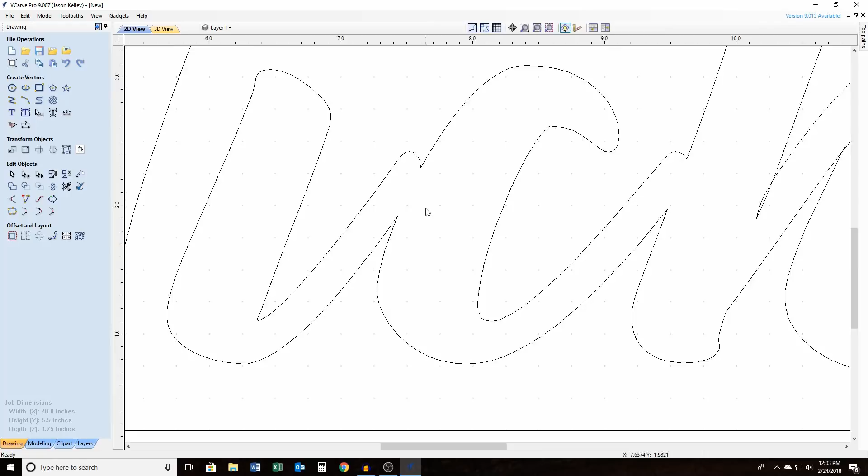Now we're going to select this whole thing again, and then come over here to this weld selected vectors function. Well, excuse me, we need to select the whole thing, and then deselect the middles of any letters. Then we'll do the weld function, and if you watch what the letters do, boom, they've all connected to each other, and it's cut out the space in between.

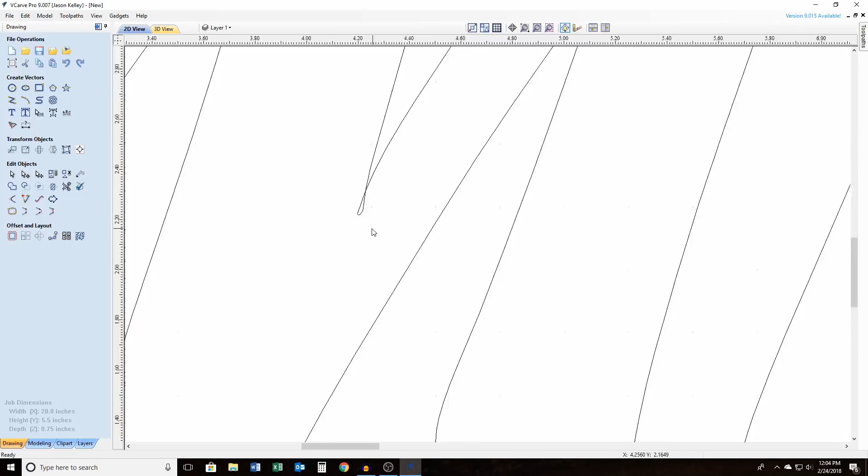Now you notice that they're still going to be separate pieces, and you might end up with something like this. So in a case like this, where you have an overlap, I don't know what else you would call it, you can come in here and just delete that, and then you've got a perfect set of connected vectors and you're ready to go. You can check it to see if there's another one. So we're going to go ahead and delete that, and then slide over here, and it looks like the rest of it's good to go.

So one more time, we're going to select all the letters, and we're going to go ahead and come over here and group them back together. Now when we click on one, they all light up. Alright, so one more time, we're just going to make sure everything's nice and centered.

And that's just about it for the text. Now we want to create our pocket toolpath. So we need to click on the outside border or the inside of the border, and we need to shift and click on the word itself.

We'll come up here to our toolpaths, and we're going to do a pocket toolpath. The way this is going to work is on our cut depth, we're going to start at 0, which is going to be the very top of the stock, and we want to cut it down to 0.2 inches.

Down here we have our clearance pass. If you don't use a larger area clearance tool, this would take you forever, especially if you use a small bit. So I usually use the larger area clearance tool, and I usually use a 1/4 inch bit depending on the size. The size of this one, 1/4 inch is just fine. My clearing bit, I'm going to use the 1/16 inch, and that's usually what I end up using for cleaning up signs that I do like this.

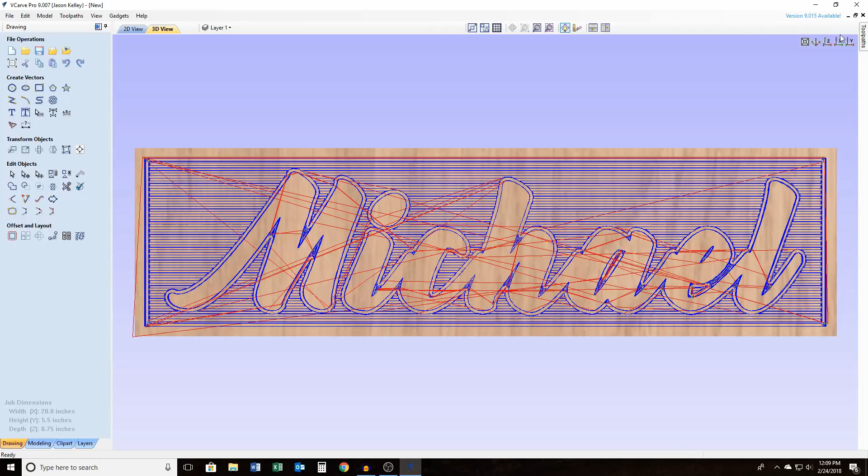And let's go ahead, we'll reset our preview, and we will see what this looks like. There's your 1/4 inch bit doing your clearing, and there's going to be 2 of those passes.

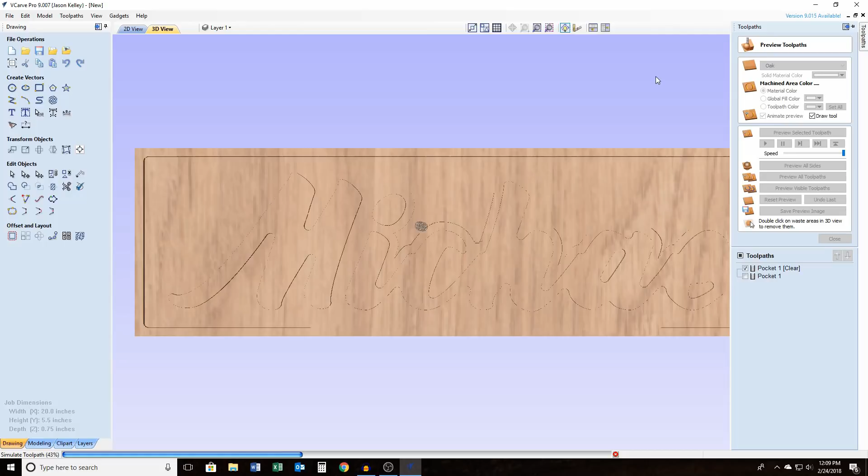Now keep in mind, I'm doing this live. It's not a voiceover. I'm wanting to do it in real time so you can see that it really doesn't take that long to design a simple sign like this and do all your toolpath work and everything else. It's pretty quick once you get the hang of it. Now we gotta wait.

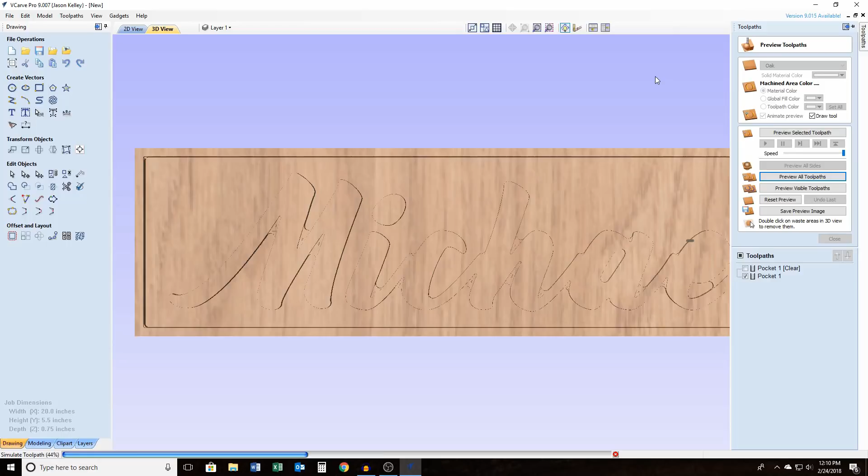Okay, now the 16th bit comes in and cleans up everything the 1/4 can't, and it's done. So there you have your

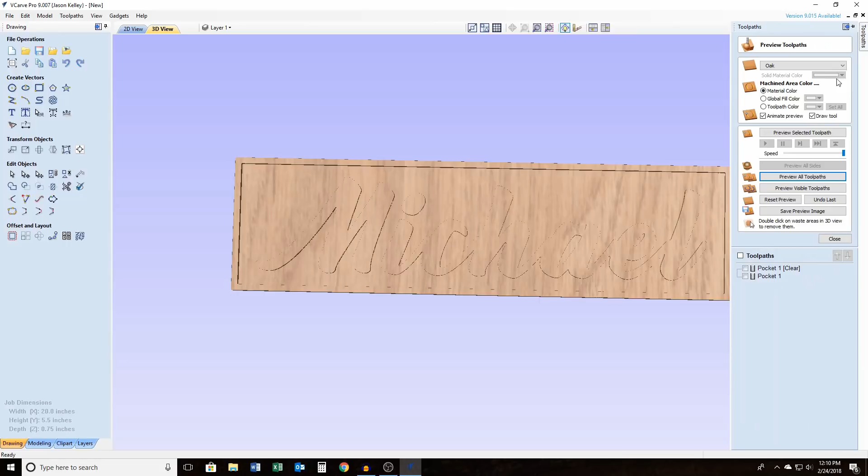You can make sure this is going to be solid wood. I'm not color filling it, but if you want to make sure your bits are able to reach all the different areas, you can fill it with some color, so you can see there's nothing that doesn't get cut because the bit doesn't fit in there. The 16th inch bit usually fits just about everywhere, so that's going to be pretty good. Alright, so on this piece, since they don't want it colored, in oak, when you do pocket carving like this, the word you carve tends to blend in with the background because it's such a grainy wood.

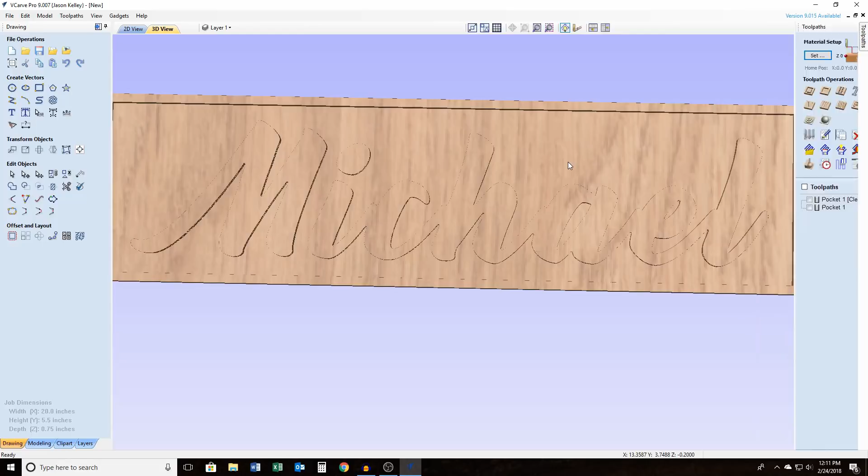So what I want to do is put a texture in the back. How we're going to do that is select our inside border, shift and select our word again, go back to our toolpaths, and go to this texture toolpath.

Now, I put all these settings in prior, and really the only way to do this is trial and error. Change your settings, preview your toolpath, and see what it looks like until you get it the way you want it. But basically, what I've chosen is a ball nose 1/8 inch bit. My start depth is 0.2 inches because that's how deep this pocket's going to be when it's pocket carved. And then you've got all these settings down here: your max cut depth, 1/8 inch, your minimum cut depth, and you can set that to whatever you want.

So there's a variation between the textures. Your cut length, you've got a max and a minimum. Your overlap, 30% is what I chose, and then you can select a variation. What that percentage does is change up your overlap 53% of the time, so you get different overlaps. And then step over, once again you set your inches and then your variation. If you want an angle, you can put it at an angle, but for this one I don't - I'm just going straight left to right, so that's 0 angle.

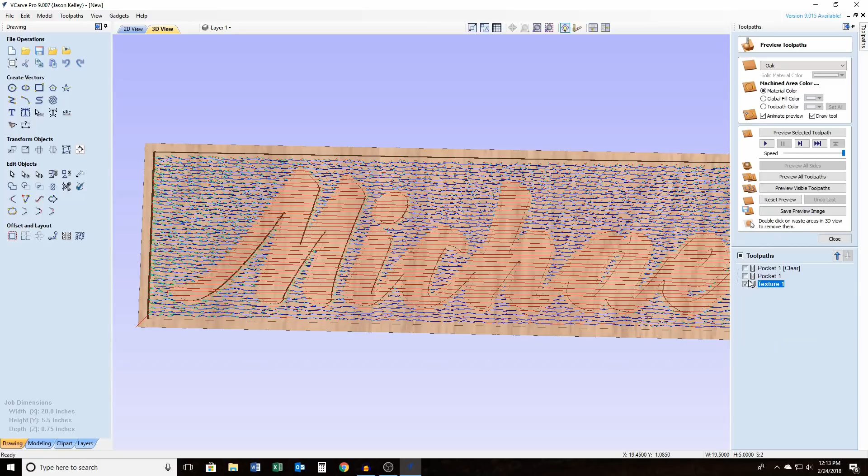And then boundary vector offset. Now, what you're going to need this for is when this little bit comes in here, you don't want it to touch the edges of this raised lettering. So what I do is give it a 100 boundary vector offset. That's going to offset from the edge of every boundary by 0.100, a little less than 1/8 inch. To see if it works, we'll calculate it, let it do its thing, and then we will preview that toolpath. And there it goes.

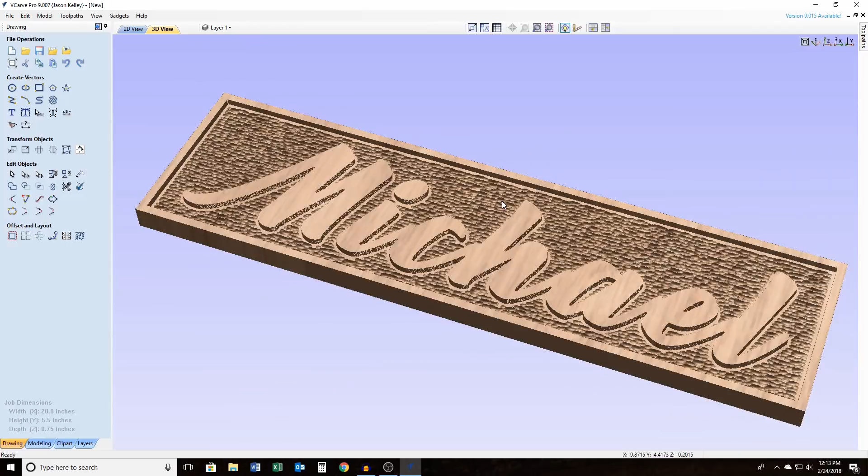Alright, so as you can see, we have a textured background with a 1/8 inch ball conical bit. We have our framed out pocket and our raised lettering. And that's it, pretty simple.

I'm not going to sit here and go through saving the toolpaths - everybody should know how to do that. But you save your toolpaths and then get out to the garage and cut it. So that's what we're fixing to do right now.

Okay guys, as you can see here, we have the piece of oak clamped down to the board. If you can't tell, I stained that oak before I clamped it on there. What I'm going for is the parts that are carved away will be lighter, the parts that remain will be darker. Hopefully that'll look good in contrast after it's all done, but that's the goal for it. So we'll see how it turns out.

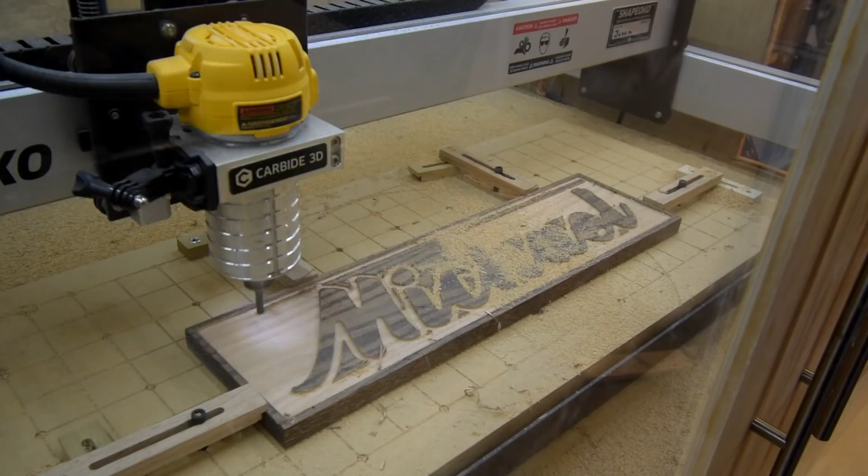Anyway, we're going to get started running this, so yeah, just check it out. Okay, so we get that part done. Now what we need to do is change to our 16th inch bit so we can get the cleanup.

Okay, we got our roughing pass done, we got our finish pass done. You could leave it the way it is right now, or like we're going to do, you could put a texture in the background.

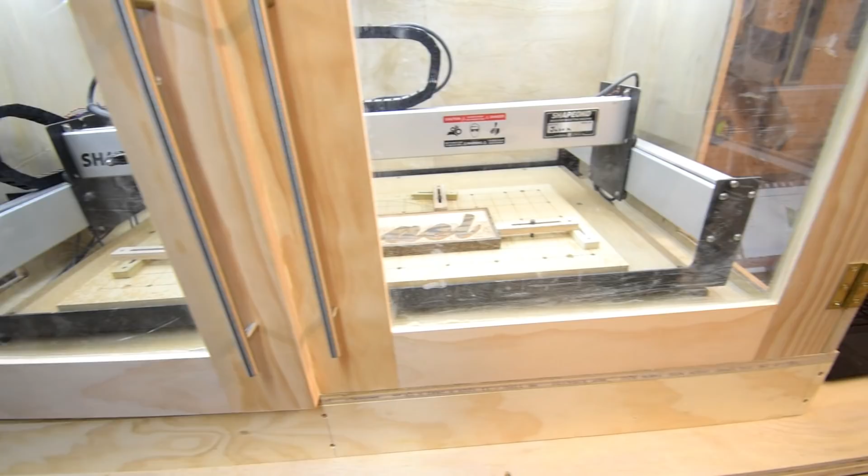All right, we're gonna let that finish running, and as soon as it's done, we'll take you back in there and we'll check it out.

Okay, well, my battery's died on my lav mic, so that's why it sounds a little different, but we are done minus the finish. So take a look here. Got a really nice texture in the background. We have contrasting letters and border. Look at that - excellent. Turned out good, had no problems whatsoever.

And we're going to finish it, and then we'll show you the final pictures, and that's it.